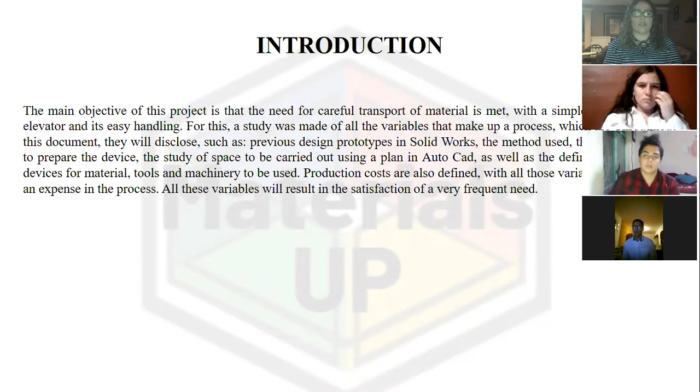The next presentation is the introduction of the project. The main objective of this project is that the need for careful transport of material is met with simple assembly of the elevator and easy handling. All these variables will result in the satisfaction of a very frequent need.

Company description: this company will carry out the safety of the operators where this elevator is located, such as in a construction company, general workshops, assembly plants, and even homes and hospitals, so that an object or material can be moved without jeopardizing the integrity of the product or the person's security.

The company has planning that assures the quality in each of the tasks that are required for the accomplishment of this project, since each one of the operators is consistent to guarantee the security of the person who is going to handle the device. Machines and tools are also used to improve the comfort of the operators. The objective is to have a high production of this device.

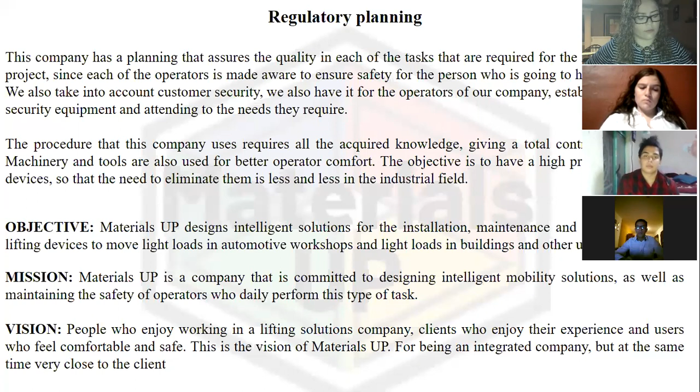In command, the manager will have a secretary who will help with the paperwork. Then we have a supervisor who will inspect the entire production process.

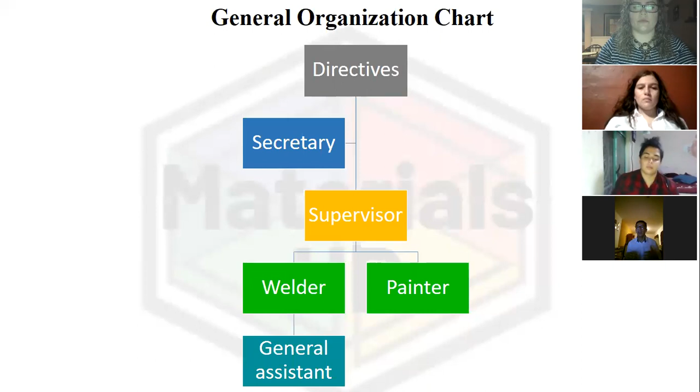For the realization of our product, we will have a welder who will be in charge of the measurement, the cut of material, and the wheel cuts. For him, we have assigned an assistant. Also, we will have a painter who will be in charge of the detailing and the painting. The next slide.

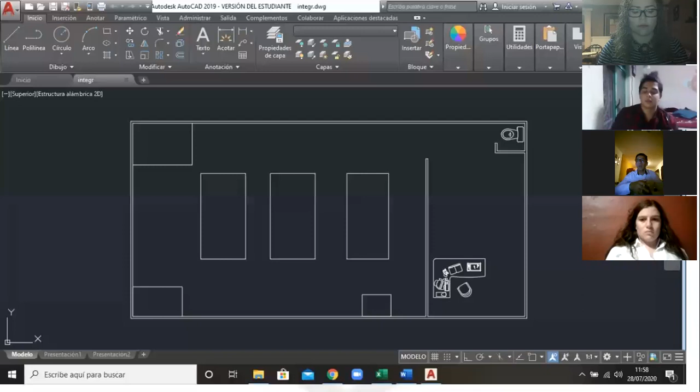As we can see in the slide, we show our work area. This place is provided by one of our partners. We decided to represent this place using AutoCAD. In the middle, we show three areas, which are the measurement and cutting area, the welding area, and the painting and detailing area.

The definition of the project: a need for a material handling device has been observed over the years. The company for which you will be carrying out this project will be in order to generate greater motivation towards the operator and greater ease of handling in this machine tool.

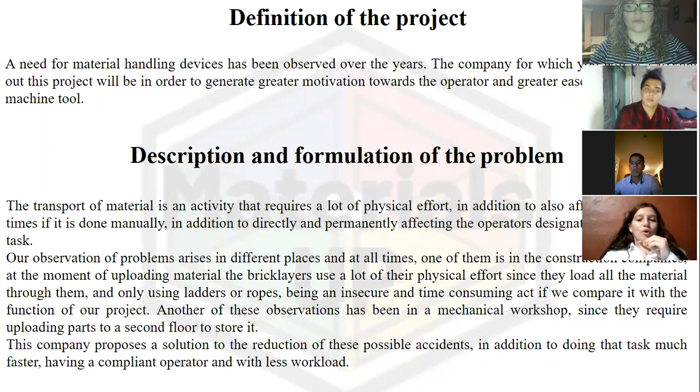Description and formulation of the problem: transporting material is an activity that requires a lot of physical effort, which led us to decide on this idea that helps in different areas and companies.

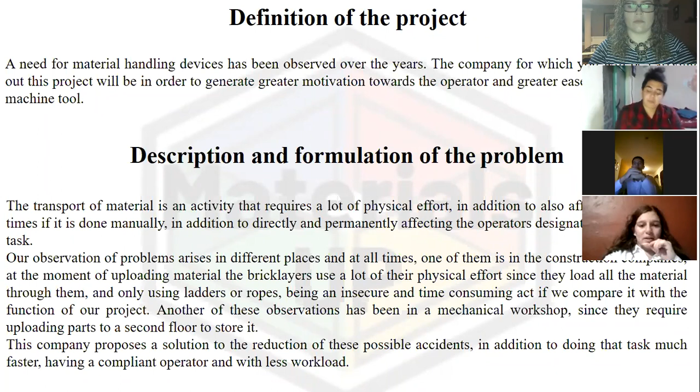Another objective: our objective is to comply with the measures, with an easy device that reduces the physical effort of the operator and the time of this activity, and also reduces accidents.

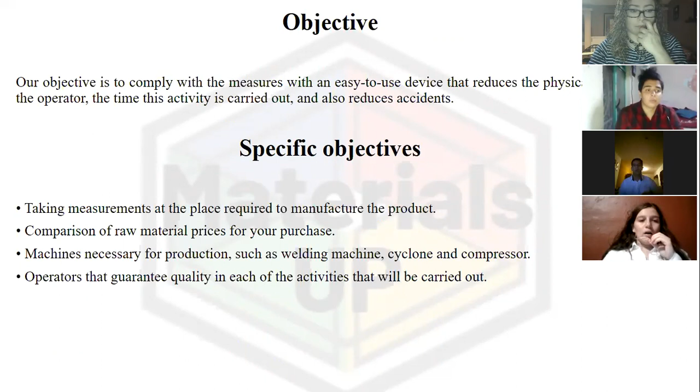The specific objectives are the machines necessary, such as welding, cyclone, and compressor, taking measurements at the place required, manufacturing the product, and operators that guarantee it.

The justification for the development of this project comes from the need of the operators, since currently there have been accidents caused by moving these products and handling the machine. It will increase the safety and productivity of doing this job, with more enthusiasm and faster, more accurate, and better quality device placement.

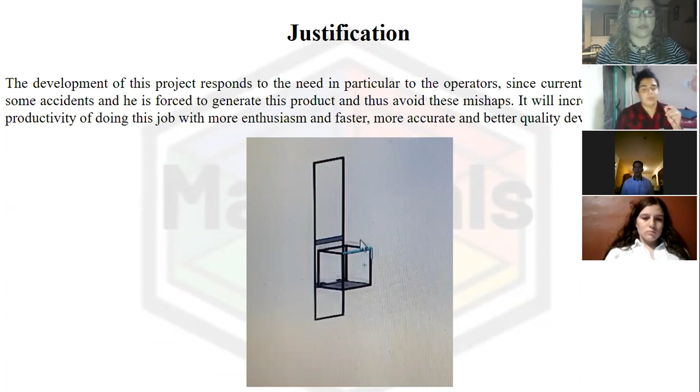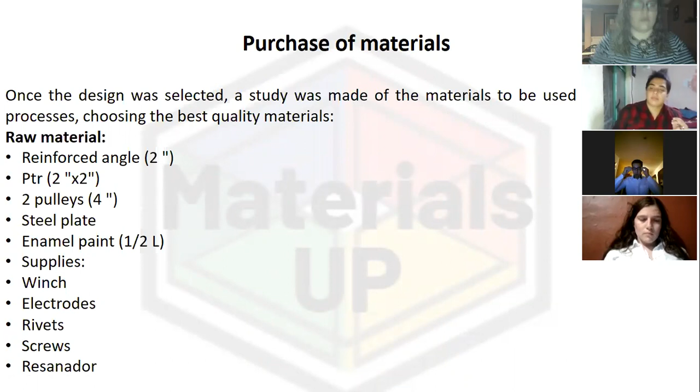This lists the materials that we will need to make the elevator. Next, this is a list of the machines that we need to make the elevator.

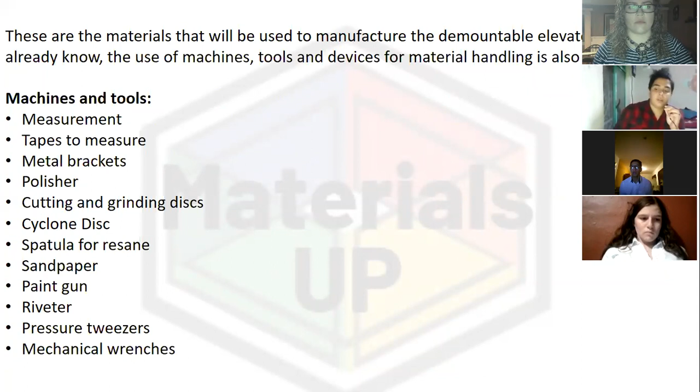To manufacture the product, the process of production has 7 steps. The first is taking a measurement.

The first thing is to take measurement of the place where it's going to be installed. We also need measurement of the base, which will be the lifting platform, so the width and length measurement will be known.

The second step is measurement of raw material. All the raw material that needs to be cut will be measured, like the angle to create the rails, and the Ptr to create the base of the mobile platform. This will be done with the help of measuring tapes and a bracket to have square profiles.

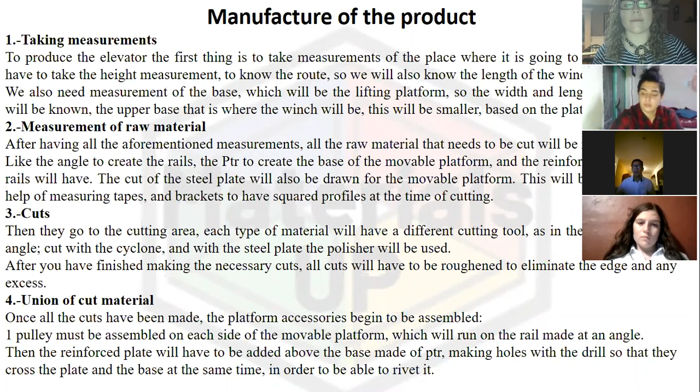The next slide: the fifth step is preparation for the painting. All the welds will have to be ground to eliminate the excess, using the polisher machine, leaving a flat surface.

The sixth step is painting. Once all the joints are detailed, the enamel paint will be applied; for this, the compressor and the spray gun will be used.

The seventh step is assembly. Once all the pieces are ready, the elevator is assembled. The angles will first be installed on the wall, which will function as rails for the pulley that the platform will have.

With the platform done, next the two PTRs will be installed, which will mark the end of the travel of the elevator.

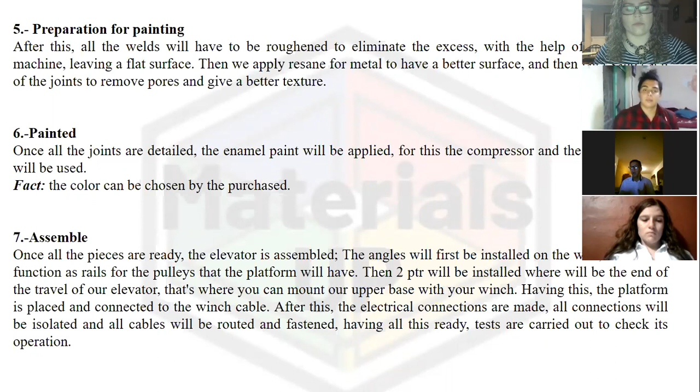That's where you can mount the upper base with the winch. The platform is placed and connected to the winch cable. Next is the electrical connection assembly. Next slide.

This is the conclusion of the presentation. The project has contributed in a very important way to identify and highlight the points about the storage and handling of heavy materials and objects that must be covered and considered to carry out a successful implementation of the compact and detachable lifting device.

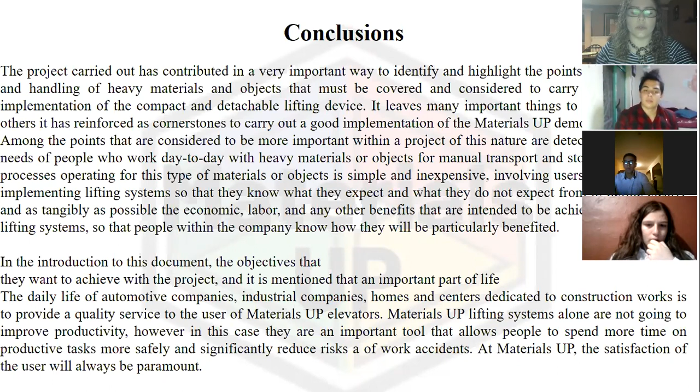And this is the end, thank you for your attention.